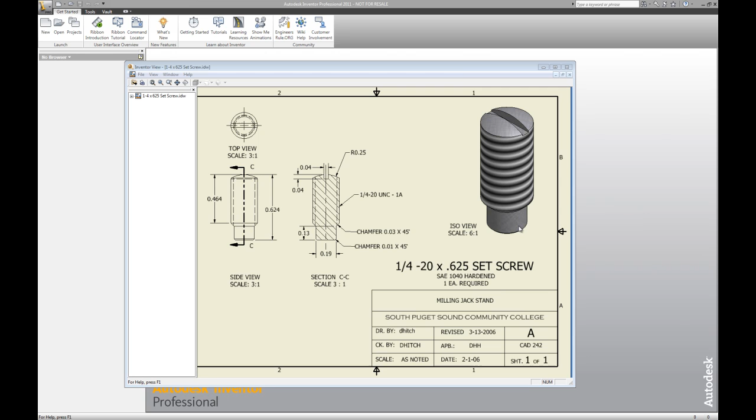Week 8 again, and here we have another quarter-20 set screw that's 5/8 long and has this smaller diameter base that's going to go in and push against an object. I think it's our pad, by the way, our locking pad.

What I want to show you here is that this little area where it has this chamfer, a third or a quarter of the way up our set screw, is kind of an interesting thing that you have to set. So I want you to be able to see how you build that.

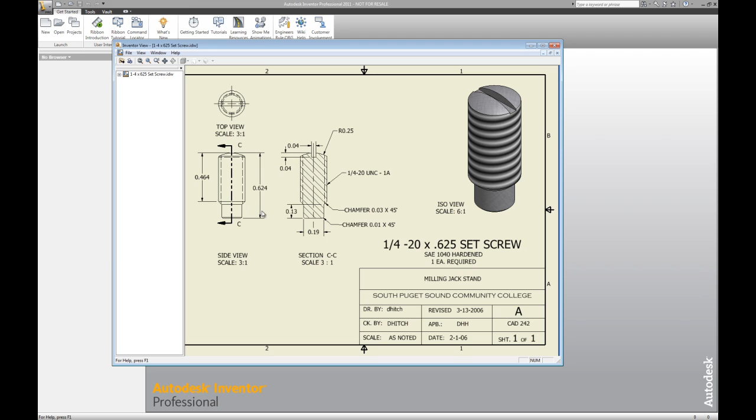Okay, so I'm going to slide this over, and I'm going to come up here and go again into my projects. I'm still in my jack stand, so I pretty much don't need to show you that anymore. And standard part here.

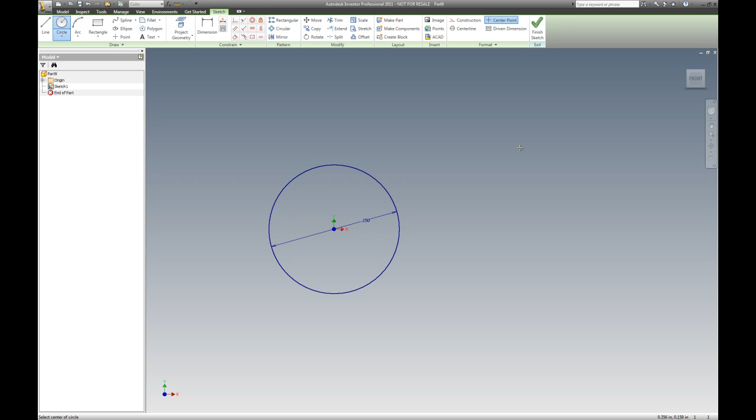Let's start with our main set screw, and it's again, I think it's 0.19 diameter. Yes, it is. Oh, this is interesting. I'm looking at this right now, and it says it's 0.25. There we go, and we do have a 0.25 radius on the top of this one. That's interesting. So anyway, we'll go ahead and finish this, and we're going to extrude this.

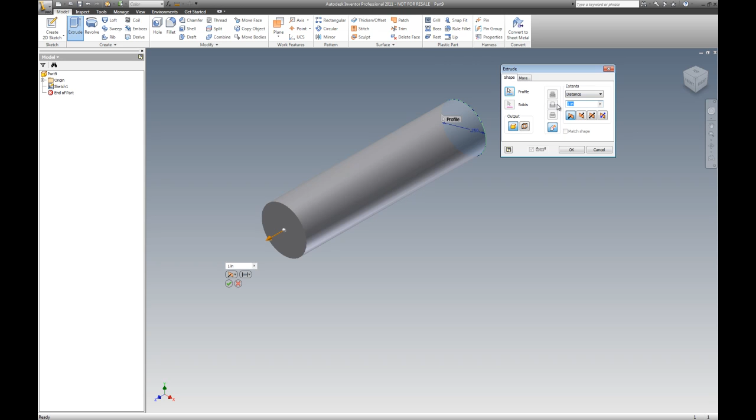My total extrusion for this is kind of an interesting thing that we need to do. That's going to be a total of, not the total height, which is 5/8, actually it's 0.624. It's going to be 0.464, and there's our length.

Again, I'm going to bring it around, stand it up, make this the front, go to here and make this my ISO, set current view as home, and zoom in here a little bit. And I'm going to go here, and we'll just go ahead and get to our origins and find a plane that we can work on. Again, we're going to work on this plane. I'm going to highlight it and make it visible.

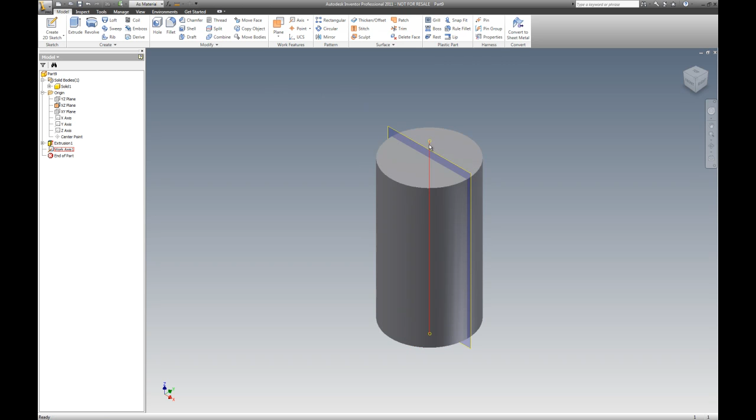I think I will, while we're here, set an axis on this. And there's my axis. And then we're going to go up to view, and we're going to turn this into a wireframe. Go back to model, and then right click, new sketch.

I'm going to pick this right here, and then I'm going to project geometry. I'm going to project the top of this and the side of this, and then I'm going to pause for a second, and I'm resuming from my pause.

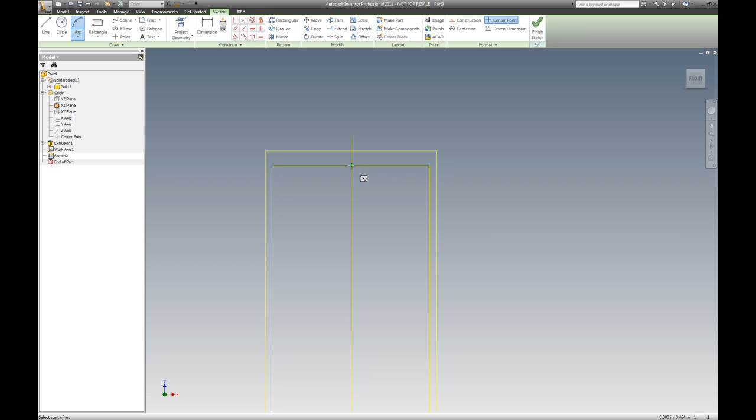We're going to go ahead and do what we did previous to this. We went in here and grabbed our arc, and picked a point right there. We came over here and picked a point there. We gave it a radius, and on this one they want 0.25. Escape, and go up to my constraints up here and pick my tangent. Moved it right down where it needs to be.

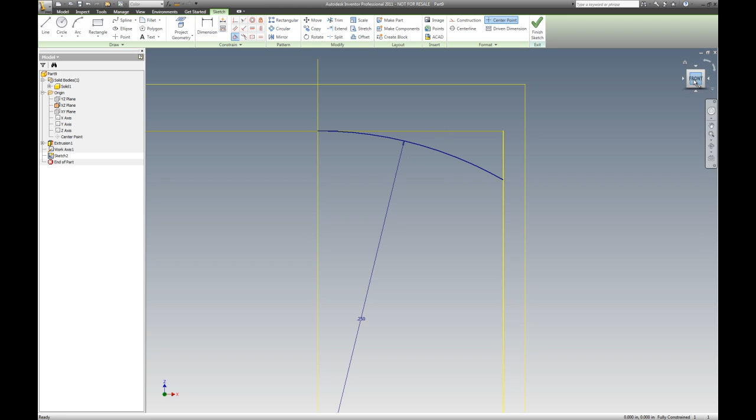Go to home, go to finish, go to revolve. So I already picked my profile. I'm going to pick my axis. I'm going to go to the cut, and I'm going to make my green check. And I bet you if we swing it around the corner, there it is, just like we want it.

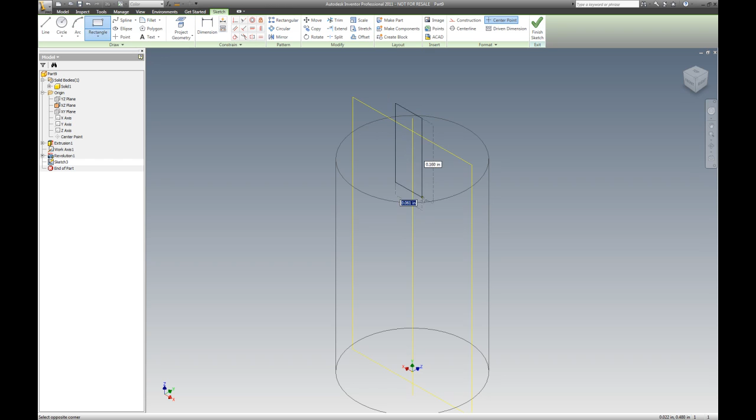Okay, while we're here, let's go new sketch. Let's pick this same sketch plane. Let's go and draw a rectangle from up here somewhere and down. And go to the front here.

We have a distance of 0.04 from here to here is a distance of 0.04, and that's edit dimension D5. So I'm going to go in here, I'm going to go dimension from, I need to project my geometry for that point right there, and then I can dimension. I'm going to go point D5 divided by 2. Oops.

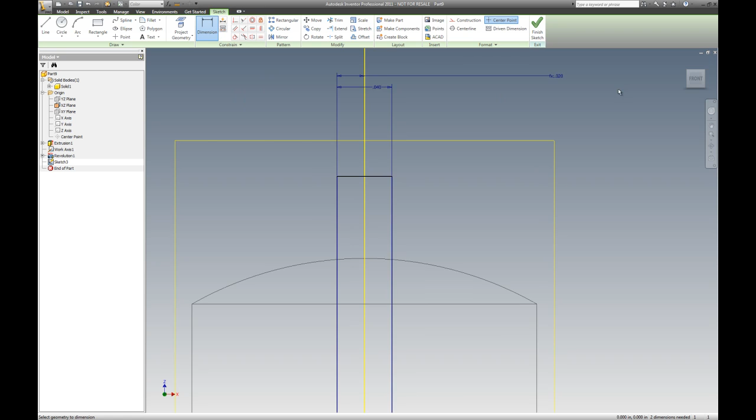D5, not point D5, but D5 divided by 2. There we go. And then we're going to go a dimension from the top, so I'm going to have to project another piece of geometry, which is this geometry here, and then I can dimension from that point there to this point.

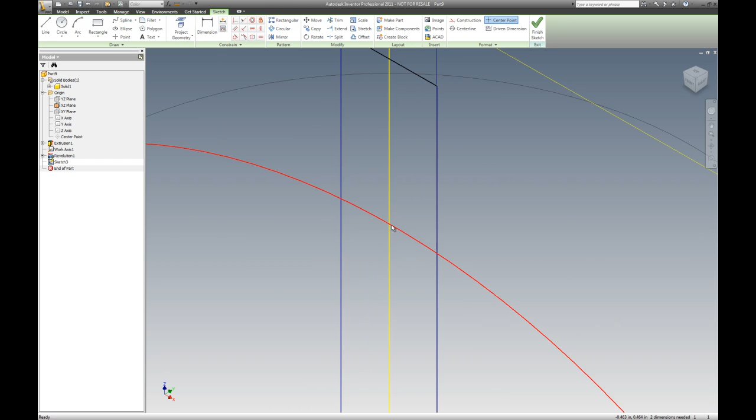Oops, it's not going to let me do that. Let's go on a side view and see if we can do it. Dimension from here to, well, I need a point in there somehow. Let's go see if we can do it this way.

Let's go to construction line and line and see if we, there it is, there's that point right there. Okay, now we got a construction line. We can now distance ourselves from that construction line and go from here to that construction line and pull ourselves out here. And we have a distance of 0.04.

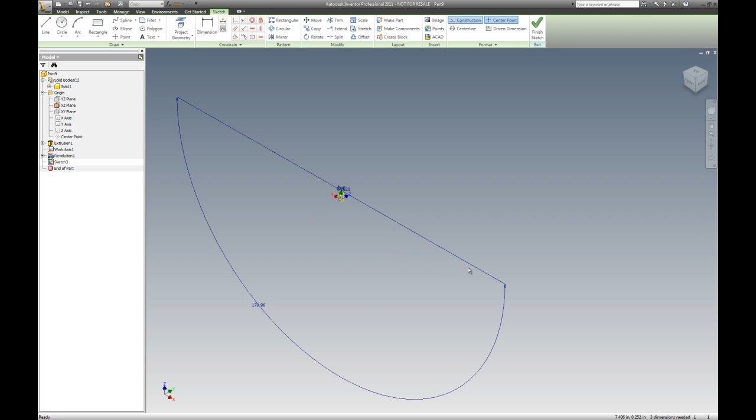0.04. Oops, what happened there? That's interesting. Come on, dimension. Pick. And, oh, let me see, there it is. There it is. And 0.04.

And it's giving me an angle. That's really interesting. Let me try something here. Let's try projecting this geometry that we drew here.

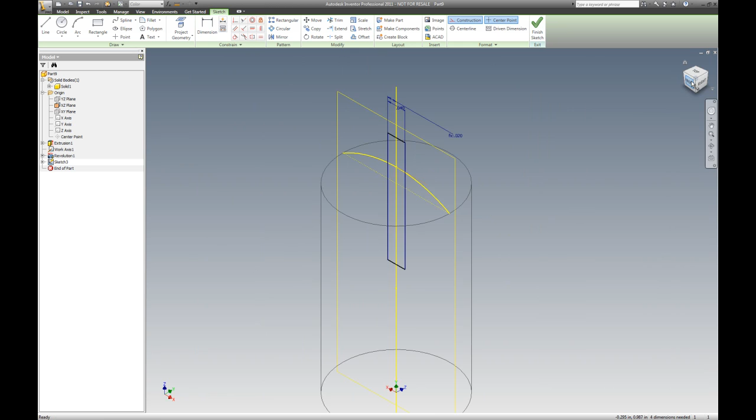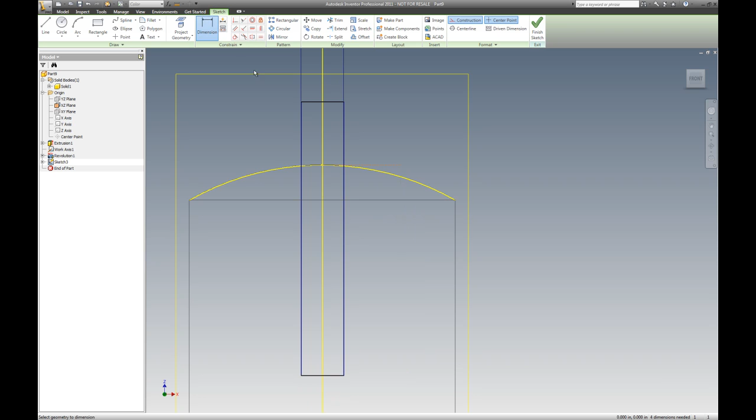I got geometry there. Project that geometry. Project geometry. Nope. Okay, let's try to dimension it from the front then. From that point there to this point here. Point to point. Wow, it really wants to give me an angle, and I don't understand what's going on there.

Well, this is just fighting me, so what I'm going to do in here is I'm going to try this one more time. I'm going to go slow and pick that point, that intersection point right there, and come down here and pick that line, and I think I may have it. And there it is, 0.04.

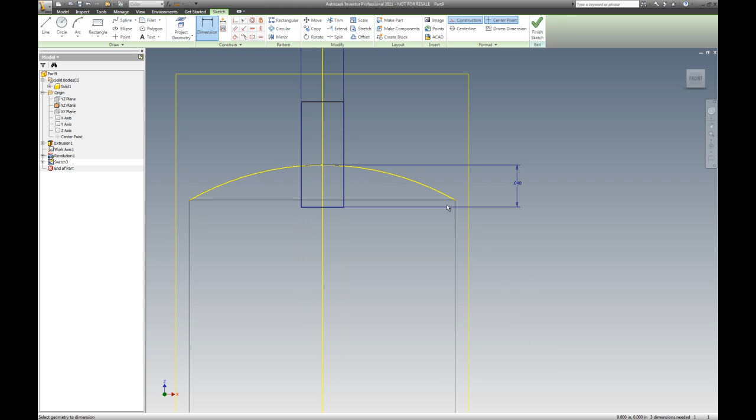Excellent. I don't care that this is up above. It really doesn't matter. I'm just going to leave it up there. Right click. Finish. We're going to extrude. We're going to pick this. We're going to go both ways. We're going to go all, and we're going to go cut. And there is our slot in the top.

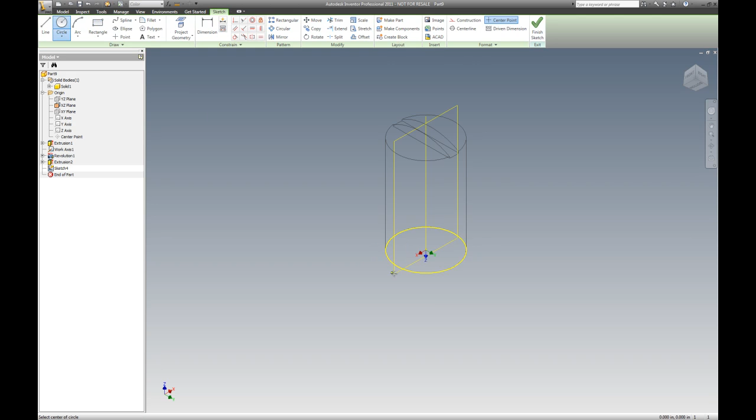Okay. Now let's work down here. We need a new sketch on this face. We need to draw a new circle, finding that center point, pulling that out, and this is a diameter of 0.19, 0.19, and finish, and extrude, and I need to go, and let me see if I can figure this out.

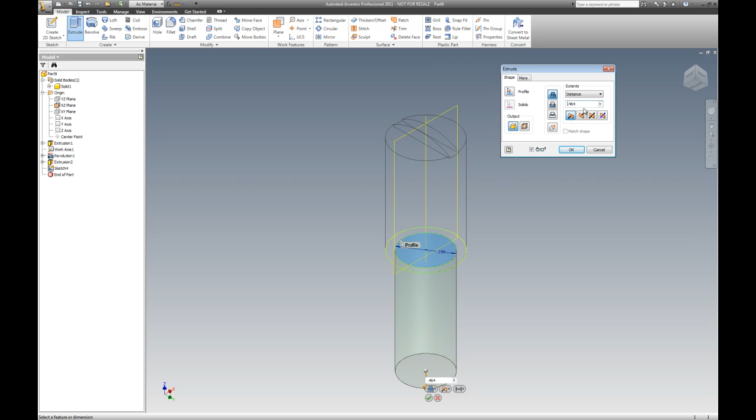It's going to be, watch this little trick, 0.624 minus 0.464, which was this upper body. Let's see if that's what we get. And look at that. See, it's so great. You don't have to do any math. I love that there's no math.

Okay, let's see if we can go do a chamfer in here. And we have a chamfer of 0.03. So we're going to go in here, 0.03. And let's see if we can get in here and chamfer that edge. And there it did. Excellent.

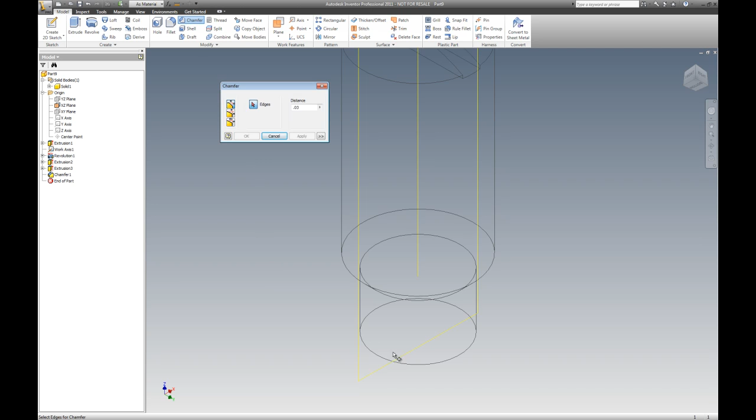And we're going to check our little box off. And then we're going to go chamfer one more time. And I believe the chamfer down here is 0.1. So I'll come up here and back that up and go to 0.1 and pick that edge and go apply. And I think we're good.

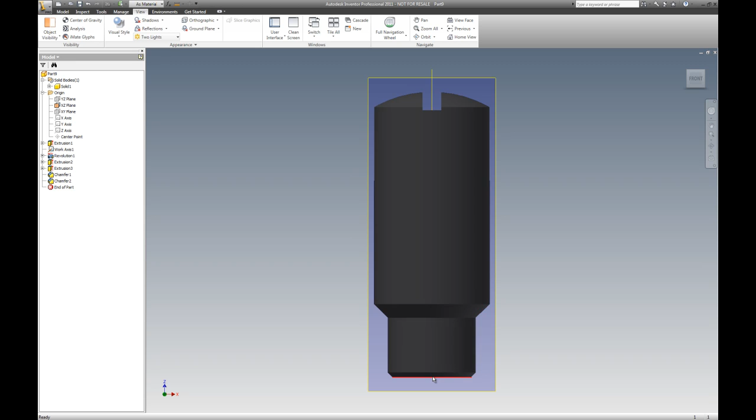We'll get up here to our view, go to realistic, and I think we are happy campers now. Let's look at our side view. There is our chamfer there. There is our straight. There is our chamfer there. There's our slot. All we're going to have to do now is add some threads.

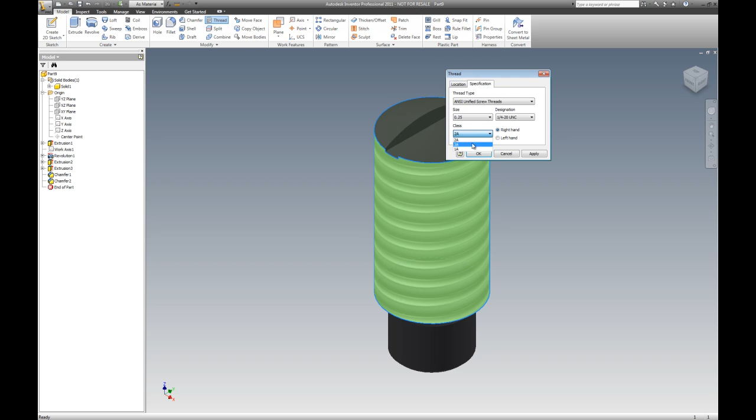I'm going to right click here and turn off my visibility. Right click here, turn off my visibility. Go into my model. We're already there. Pick here and quarter 20 A1, so 1A, quarter 20 UNC, and apply. And we now have our little project done, and that's just 10 minutes.